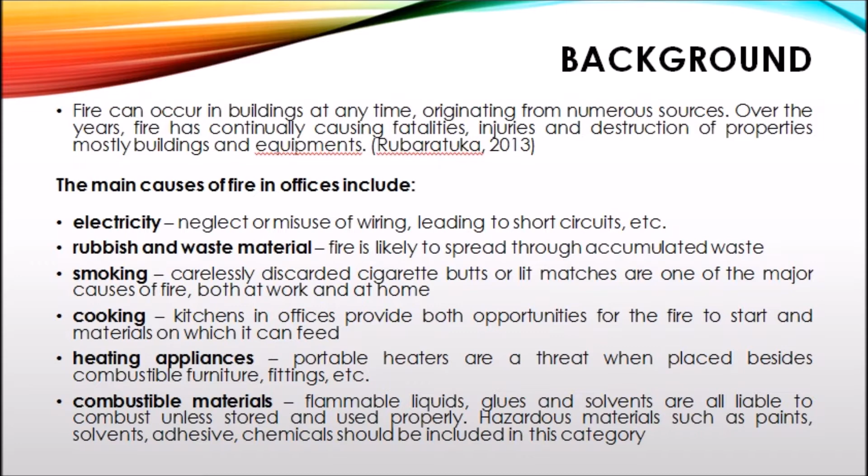Fire can occur in buildings at any time, originating from numerous sources. Over the years, fire has continually caused fatalities, injuries and destruction of properties, mostly buildings and equipment. That is what Rubaratuka 2013 said. So the main causes of fire in offices include electricity, rubbish and waste material, smoking, cooking, heating appliances and combustible material.

So the critical cause influencing fire incidents in buildings is electrical and lighting equipment, which had 1,765 cases in 2011 and decreased in the following years, as there were only 934 cases in 2013. This is different when the statistic is compared to the US Fire Department, where the critical cause influencing fire incidents is cooking equipment.

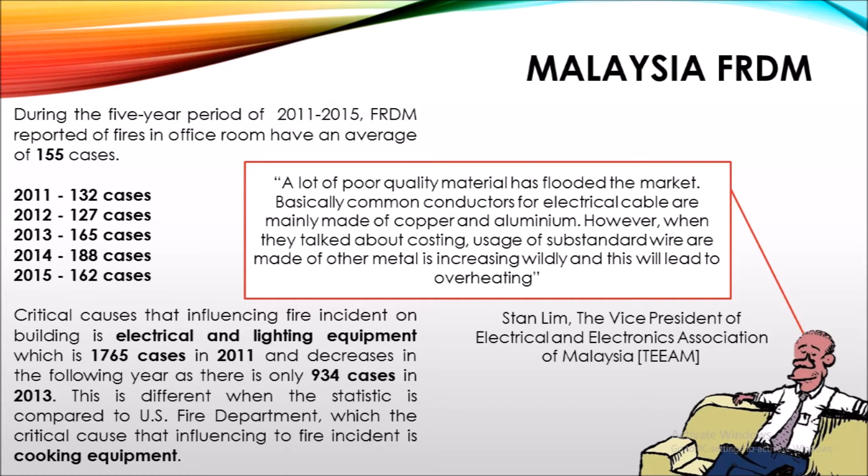So Stan Lim, the Vice President of the Electrical and Electronic Association of Malaysia, said that a lot of poor quality material has flooded the market. Basically, common conductors for electrical cable are mainly made of copper and aluminium. However, when it comes to costing, usage of substandard wire made of other metals is increasing wildly, and this will lead to overheating. So this is the main cause of electrical and lighting equipment causing a fire event.

Okay, for the problem statement, tenability study for a specific location is important as a lot of lessons can be learned by doing it. Performing a tenability study may provide guidance for occupants and firefighters in the case of fire. One of the components of tenability study is conducting evacuation analysis, which is based on tenability limit parameters, namely visibility, smoke layer and toxicity.

So for the first one, the problem of occupant condition and lack of fire detection and suppression contributes to the increase in fire events, injury and death. The problem is studied with tenability limits analysis in terms of the time taken for occupants to escape before conditions become life-threatening or untenable in a fire event.

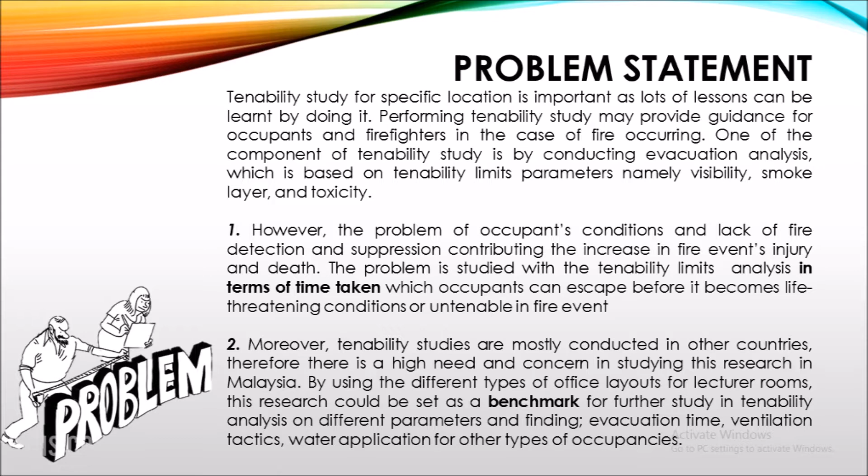Second, tenability studies are mostly conducted in other countries. Therefore, there is a high need and concern for this research in Malaysia. By using different types of office layout for lecturer rooms, this research could be set as a benchmark for further study in tenability analysis on different parameters and findings. For example, evacuation time, ventilation tactics, water application for other types of occupancy.

Okay, so for the objective, the main objective is to determine the relationship of tenability criteria such as smoke layer, visibility and toxicity to the survivability of occupants, meaning lecturers, in single office rooms according to the accuracy of B-RISK in predicting the probabilistic analysis.

For the sub-objectives: first, to conduct a survey in 25 lecturers' office rooms with different types of layout at the Department of Chemical and Environmental Engineering, Faculty of Engineering, UPM, as a benchmark in collecting data for fire modeling. Second, to carry out probabilistic analysis based on the collected data using the B-RISK fire modeling tool. Third, to analyze the tenability criteria for occupant exposure in terms of the time taken for occupants to be in an untenable condition, particularly for single office rooms.

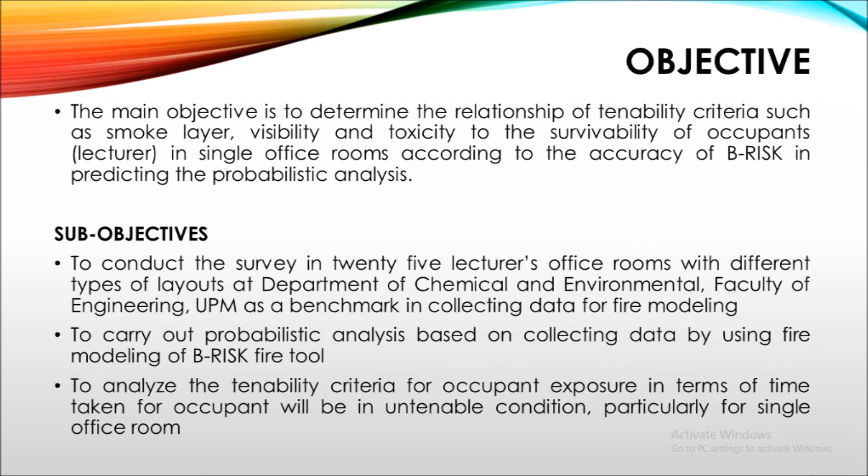Okay, for the literature review, the first one is Wei Gao 2013, fire load in students' dormitory buildings. He believed that the type of room, students' grade and type of combustibles influence the magnitude of fire load. For his findings, he conducted a survey using an internet questionnaire in order to survey a larger number of student dormitory buildings across the country. The fire load density of all the surveyed buildings shows a normal distribution with a mean value of 537 megajoules. The maximum value is 812 and the minimum value is 234 megajoules per meter square.

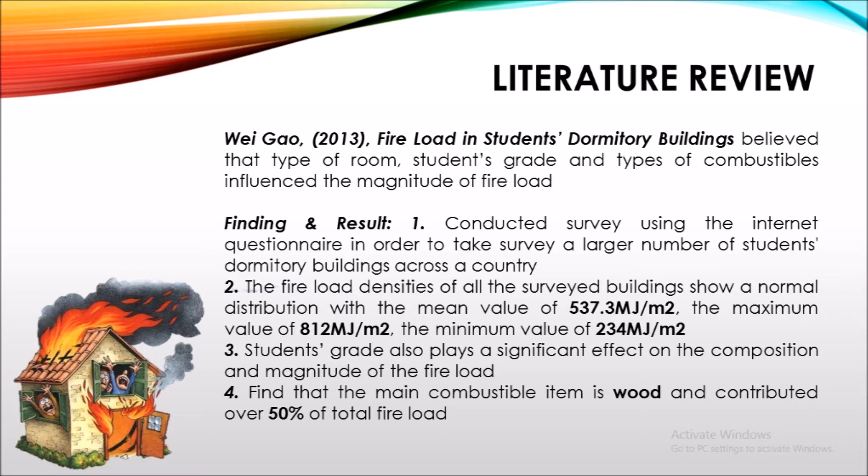Student grades also play a significant effect on the composition and magnitude of the fire load. They found that the main combustible item is wood, which contributed over 50% of the total fire load.

Okay, the second one is MC Luo 1999, application of fire models to fire safety engineering. He proposed that fire models are essential tools for the fire engineering approach, using CFAST to determine tenability analysis for the fire safety system designed for a building. For his findings, he used the CFAST fire model to analyze the tenability criteria in toxic gases and smoke layer based on calculation of the fractional effective dose (FED).

So occupants will become unconscious when the FED value reaches 1.0. To ensure the safety of occupants during fire, 0.5 is used as the maximum value of FED for a tenable condition. The FED value in the kitchen reaches 0.5 in 250 seconds and 1.0 in 320 seconds.

If fire starts in the dining area, the tenable time in this area is 650 seconds when the FED value arrives at 0.5. The evacuation time of the restaurant is estimated to be 525 seconds, equal to 8.75 minutes. He concludes that the occupants in the restaurant can be evacuated safely.

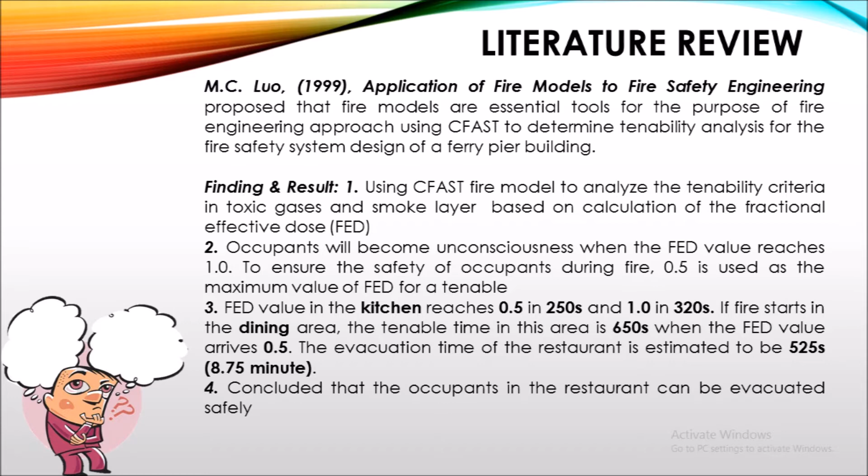Okay, for the methodology, we have 5 steps. For the first one, survey on combustible items in the office room. I need to make a checklist survey for all 25 office rooms for the Faculty of Engineering in the chemical department. And then second, determine the total fire load density and heat release rate.

After making a survey, I need to determine the calorific value for each combustible item and then determine the fire load, calculate the fire load density and find the heat release rate from the journal, and then set up B-RISK model with compartment characteristics and fire design.

This one uses the dimensions of the survey from the room and then sets up the various models, and then runs B-RISK simulations with collected data, and then data analysis in studying the tenability limits under probabilistic measurement.

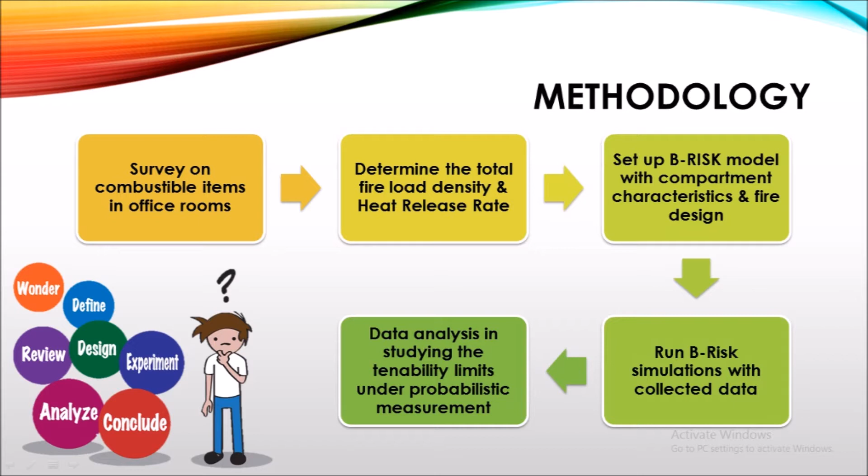For the survey on combustible items in office room, I have surveyed 25 office rooms by measuring and estimating the combustible items in each room. There are 2 sizes of office room, labeled as small and big room.

The small rooms are built with windows facing a closed building, while the big rooms are built with windows facing the outside environment. As all rooms were surveyed, they have the same fire detection and suppression system and ventilation system, with all rooms having one fire sprinkler and no smoke detector or smoke alarm.

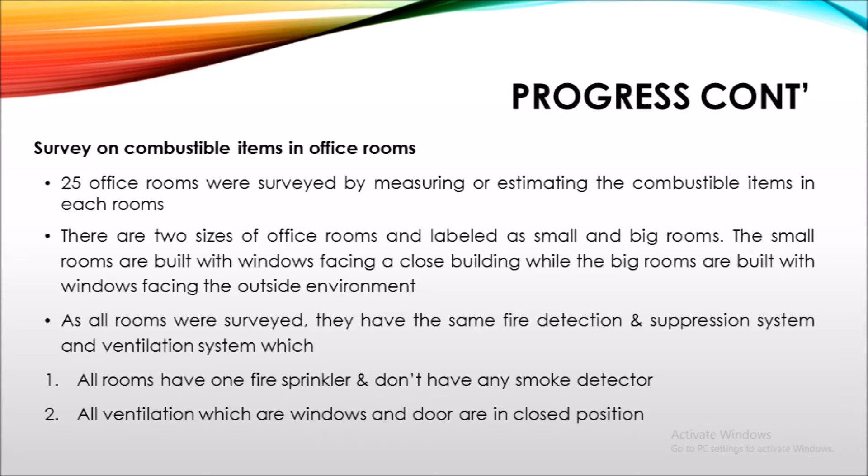So the second one is all ventilation, which are windows and doors are in closed position during working hours.

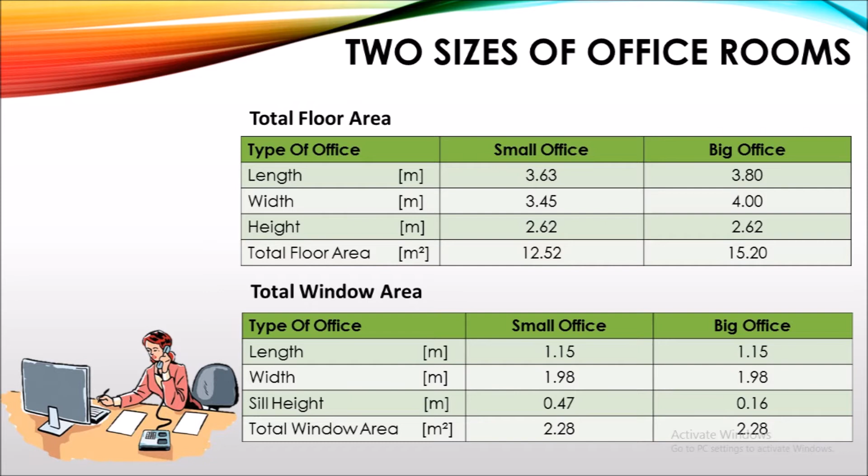This one is the table of the 2 sizes of office room. The first table is the total floor area. They have different total floor areas because the small office room is 12.52 meters square, and the big office room is 15.20 meters square. For the total window area table, both offices have the same area, which is 2.28 meters square.

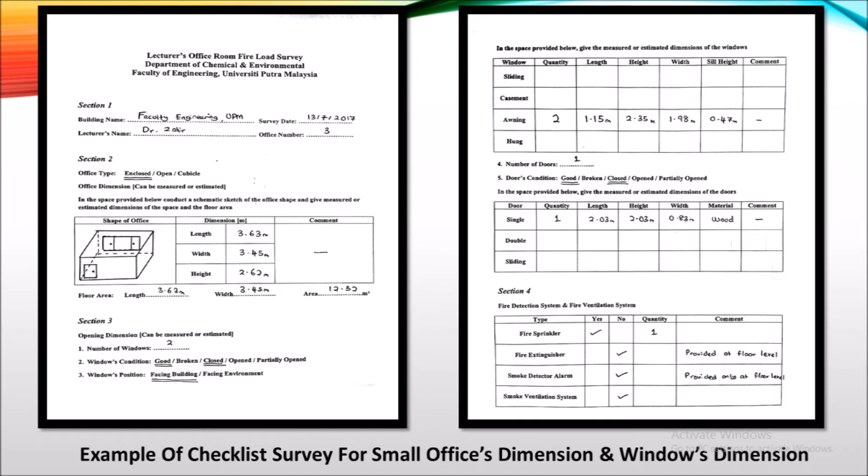This one is the example of checklist survey for small office dimension and window dimension. The second one is the example of checklist survey for big office dimension and window dimension. So this is the example of my work for the documentation.

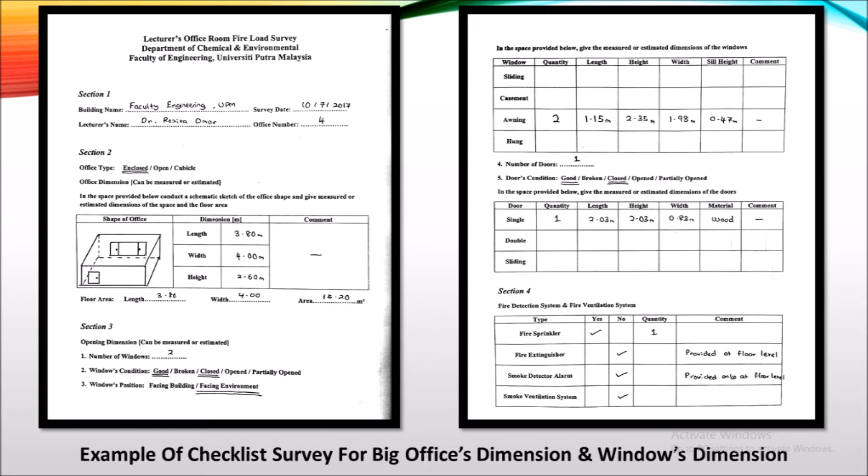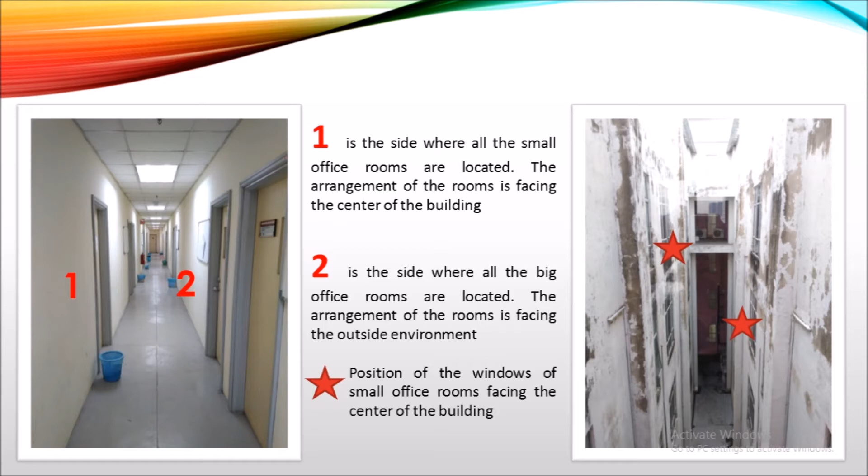And the star sign is the position of the windows of the small office room that face the center of the buildings.

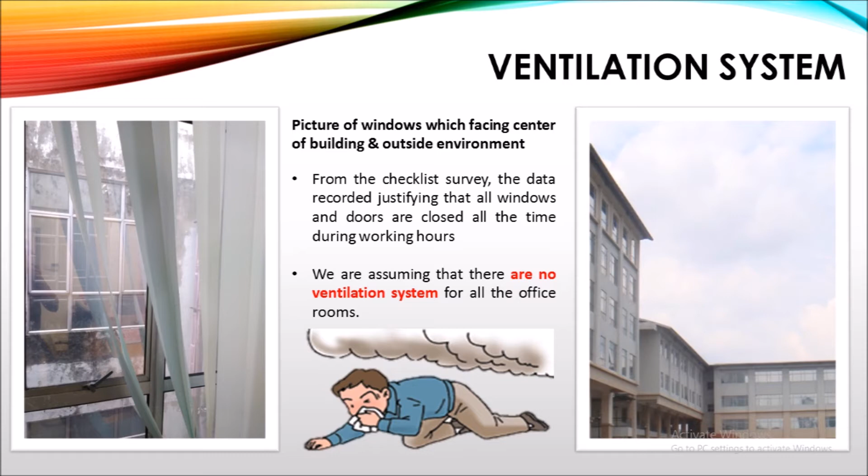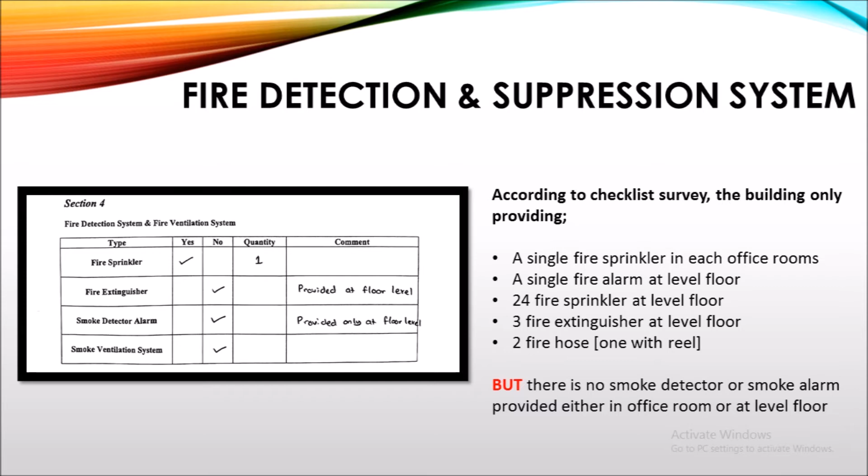So when I look at the office, there is no smoke detector alarm. So because when a fire event happens, the smoke layer will occupy the room first before the fire will spread.

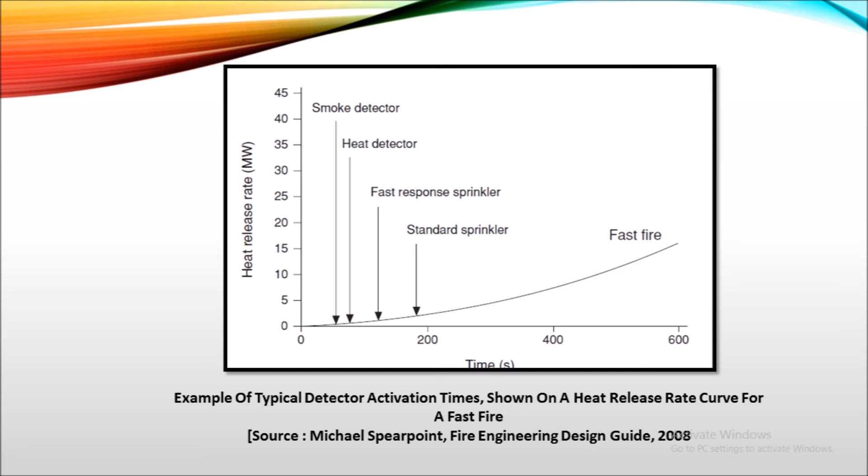Okay, now we move to the fire load. So the combustible items were recorded into 3 groups, which are permanent fire load, semi-permanent fire load, and movable fire load. This is how I distribute the survey from the documentation.

For the permanent fire load, the combustible items are categorized as the basic furniture and appliances provided by Universiti Putra Malaysia. For semi-permanent fire load, the combustible items are categorized as the furniture or appliances provided by occupants or lecturers, which can be removed from time to time.

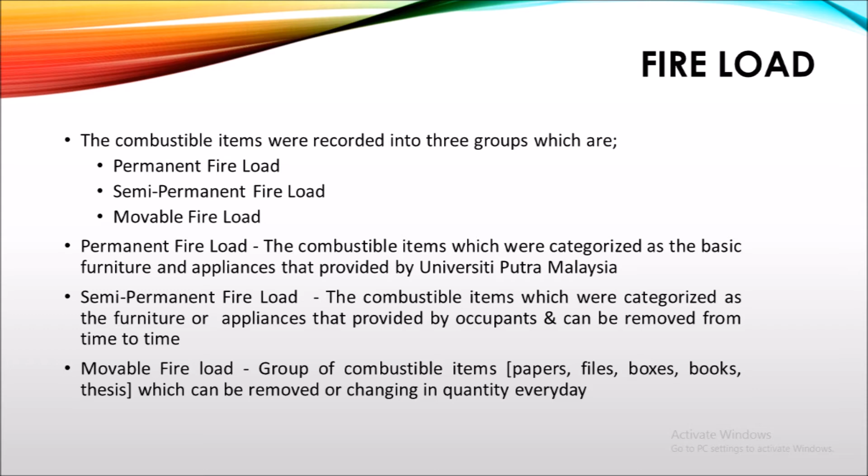So for the movable fire load, it's a group of combustible items such as papers, files, boxes, books or thesis, which can be removed or change in quantity every day.

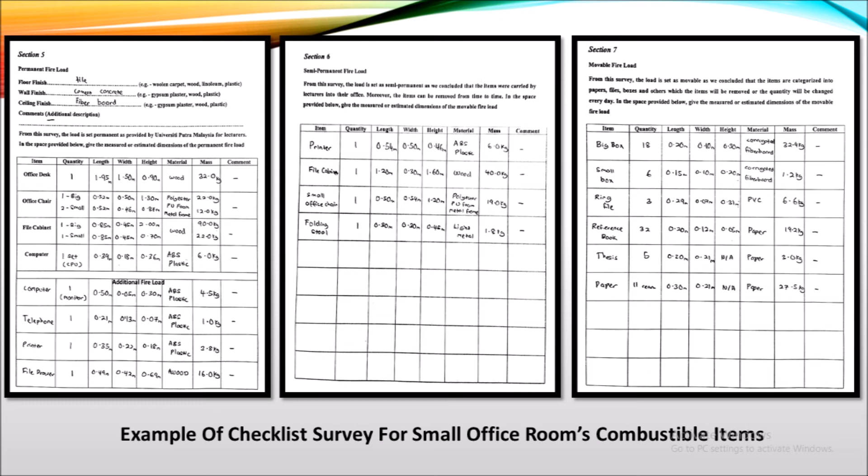This is another example of my checklist survey for documentation that I did during my holiday. This is an example of the permanent fire load, semi-permanent fire load, and movable fire load for one of the small office room combustible item surveys.

This is the table for the combustible item measurement. I take one example of a small office room measurement. In the table we can see I put all the items for the room, the dimension of each item, the mass, the total mass, and the material of each item.

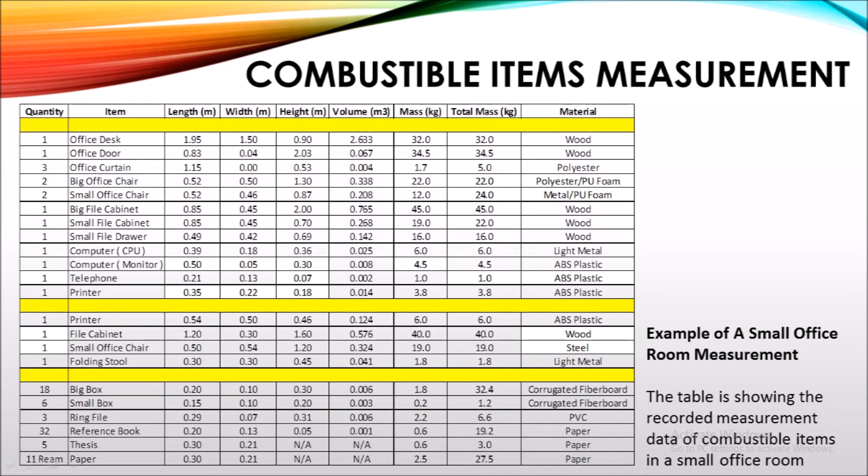This is the calculation of the fire load and fire load energy density. From the table I list all the combustible items, and I total up the weight and the calorific value of each item to get the total fire load for that room. Then from the total fire load, I divide it by the floor area calculated before to get the fire load energy density for that room.

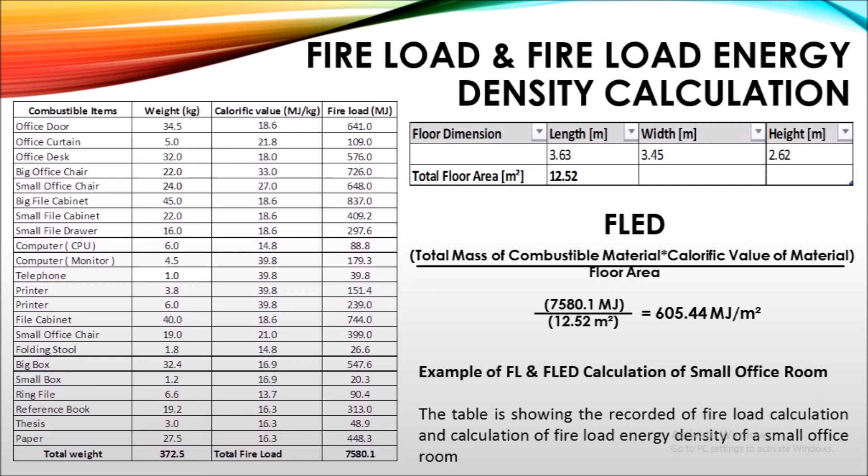This is one example of the small office room fire load energy density, which has a value of 605.44 megajoules per meter square.

The table shows the total fire load I got from all the offices, both small and big office rooms. From that I calculate the average for both office types. For the small office room, the highest total fire load is 17,144 megajoules, which is office number 5.

The average for all small offices is 8,804.7 megajoules, and the lowest one is 4,662.8 megajoules, which is office 6.

For the big office room, the highest one is 25,103.7 megajoules, which is office 2.

The average is 15,978.2 megajoules, and the lowest one is 11,053.7 megajoules, which is office 6.

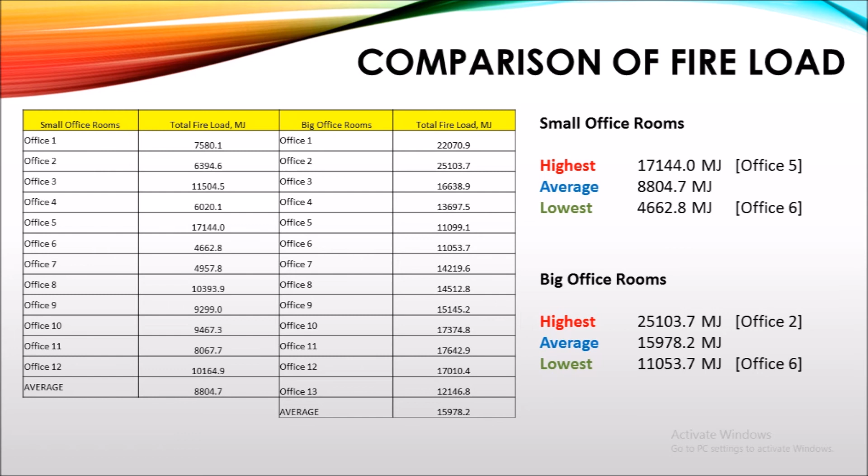This is the comparison of fire load energy density for all office rooms. From the table I calculate all the fire load energy density using the formula, and I calculate the average too. For the small office room, the highest one is 1,368.94 megajoules per meter square, which is office 5.

The average is 703.10 megajoules per meter square, and the lowest is 372.33 megajoules per meter square, which is office 6.

For the big office room, the highest one is 1,651.56 megajoules per meter square. The average is 1,051.20 megajoules per meter square, and the lowest one is 727.22 megajoules per meter square.

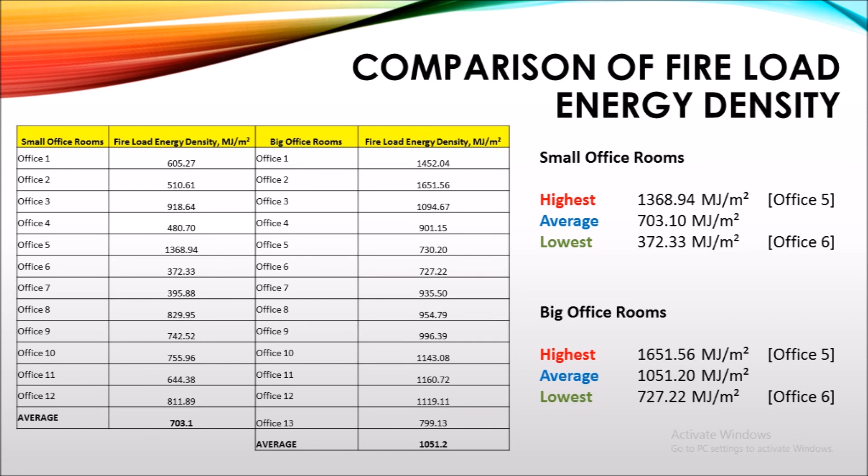After I got all the fire load energy density values, now I move to the heat release rate value. For the heat release rate, I need to find values from journals, internet sources, or reviews, because to measure heat release rate directly we would need to conduct an experiment. This is one of our limitations for this research.

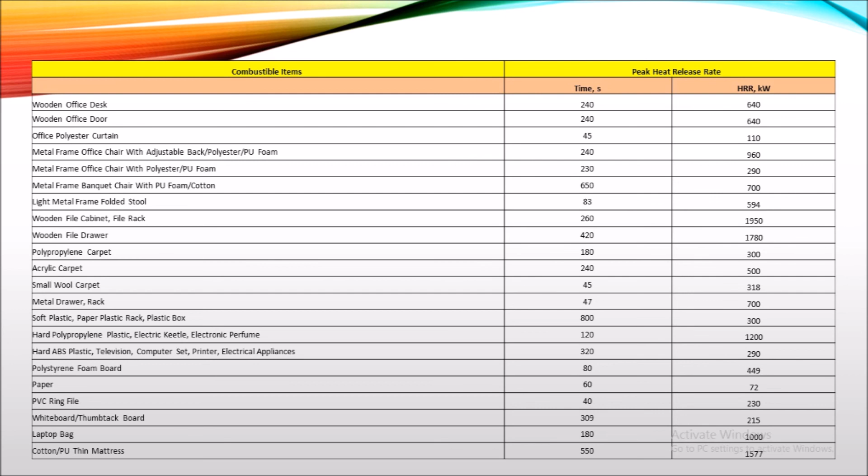After discussion, we will use previous research for the value of heat release rate of each combustible item, and we will find the average from different journals. This is the table for the heat release rate that I have already recorded for the research.

Okay, so that's all for the progress I have done. For the next step, after finding the HRR value, the HRR value is very important for the B-RISK setup, because it will show the HRR profile for each room.

From that profile we can find the tenability limits in order to see the profile of fire spread and flashover, which could affect the time occupants have before becoming untenable to the fire event.

So the next step is to set up the B-RISK model, run the B-Risk simulation, and then do data analysis studying the tenability limits under probabilistic measurement, which is seeing the profile of the smoke layer, the toxicity, and the visibility of occupants in terms of time taken before they become untenable to the fire event.